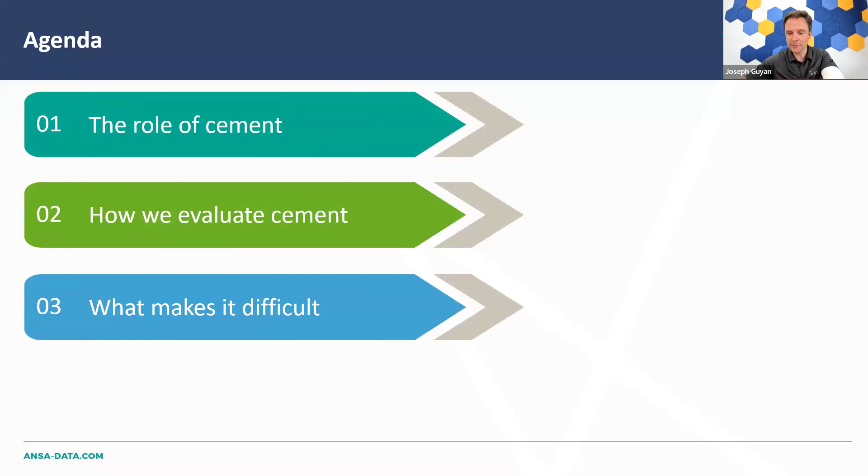So I'll spend just 5 minutes setting the scene for everybody. Let's see what we got first of all. So very simply, we'll just talk about what is cement doing in your well? Why is it there? It's all the well integrity and zonal isolation, and some examples of why it could fail and their consequences. We'll talk a little bit about how to evaluate cement, concentrating on sonic logging methods and what they show. We'll ask ourselves what makes it difficult, what are the limitations of logging tools and any real-world obstacles that we might have. What do ultrasonic tools add to this?

This leads us nicely into the example that Faris is going to show us, which will be concentrating on the logging tool that we've seen quite a lot of lately, the NuSonix from Cereus Ultrasonics. We'll talk a little bit about that and what it's bringing to the show.

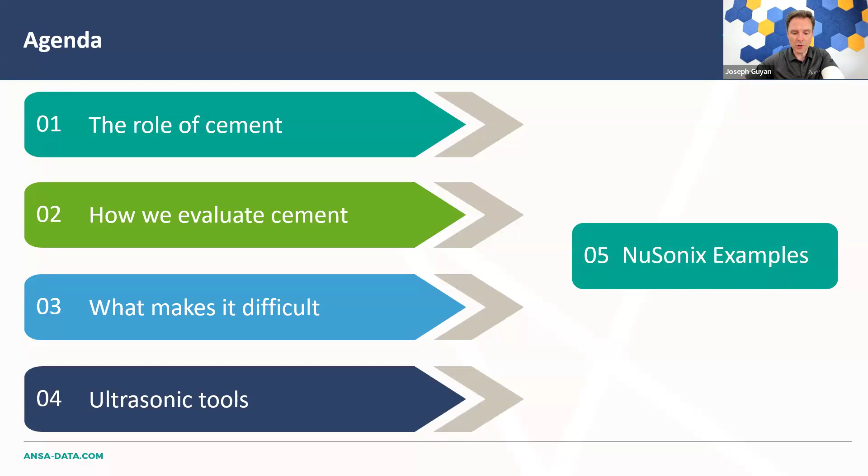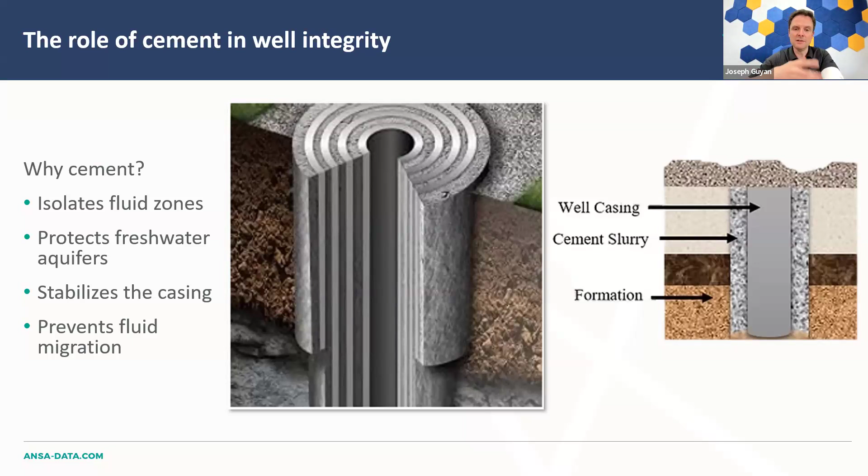So the role of cement, very simply, again, this is going to be a very quick version of it, but in oil and gas wells and geothermal and various other wells, where does the cement go and what role does it play in well integrity? It's a broad topic. Very quickly, the cement is placed in those spaces between the well casing and the borehole wall, and sometimes between other concentric strings. Its purpose is to seal and support the well. It stabilizes the well, ensuring several critical aspects of isolation, and ideally it continues to function in that way for decades after completing the well.

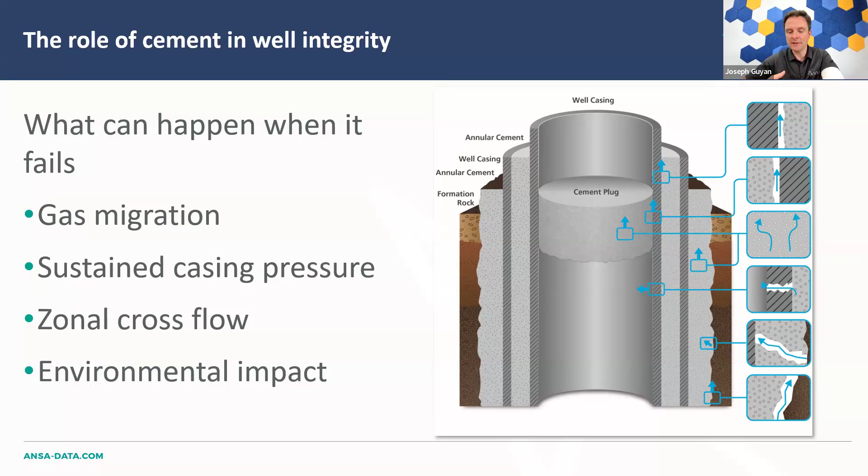So what can happen if it doesn't go all to plan? Perhaps the cement itself doesn't bond properly to the casing or to the formation wall. Perhaps it degrades over time for various reasons, and the consequences of that can be severe. For example, the produced fluids could migrate between zones downhole, or perhaps migrate to surface or into freshwater aquifers. Cement failure itself can manifest in several ways, which affects production, safe operation, and preservation of the environment. So evaluating cement bond integrity really isn't optional. Managing your well integrity can be seen as a license to operate, and that's what leads us to the technologies that we're discussing today.

So why is it so hard to look at? It's kind of obvious, but once it's in the well, you can't look at it. We can't inspect it directly. So we generally rely on acoustic logging methods to evaluate how well it's bonded to the metal of the casing and to the formation wall. And the most widely used method is the cement bond log, or CBL.

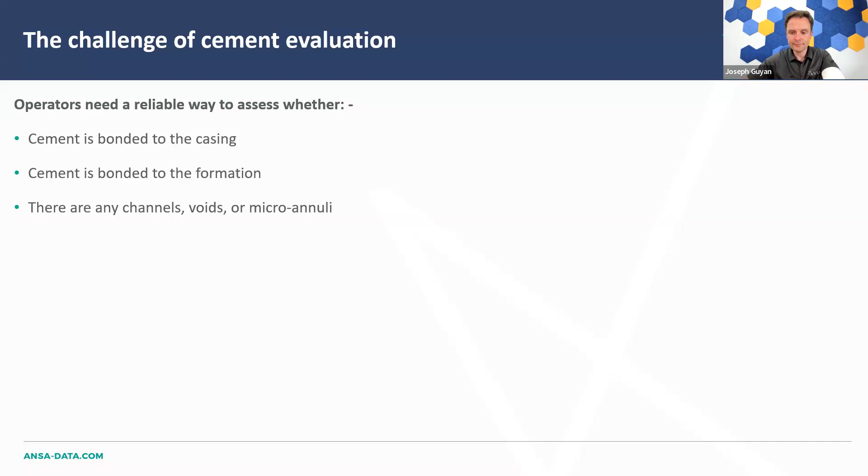Again, another big topic on its own. You can run a week's training course on this. We're going to brush over it very quickly, but I'll just say that for the moment, these tools measure how acoustic waves travel through the casing. Specifically, it measures the amplitude of the signal traveling down the casing, which gives quantitative information about the cement casing bond.

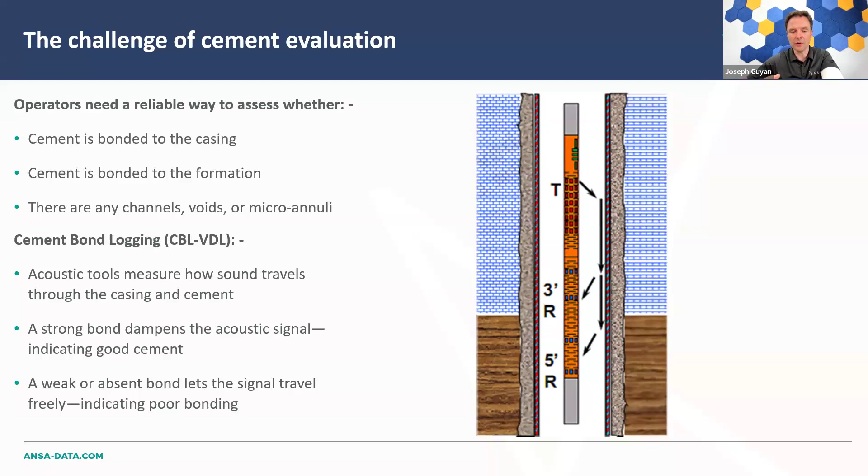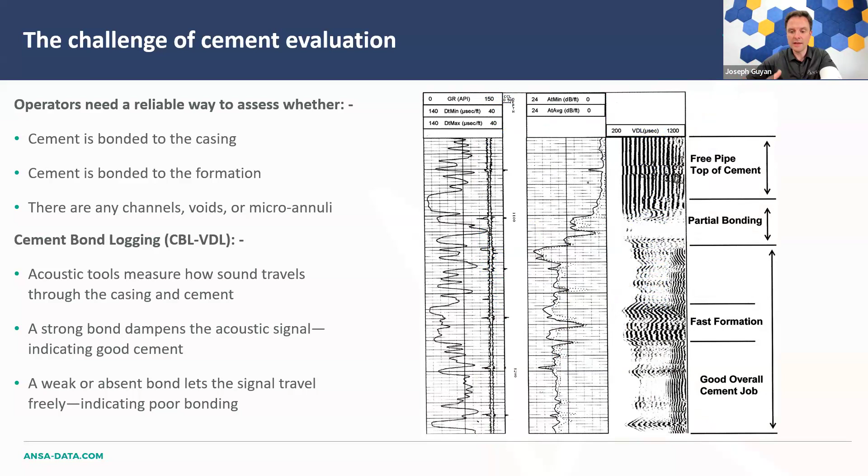And another aspect of that measure, the variable density log, seen there on the right of that image, provides information about the cement to formation bond. So using the VDL and the amplitude log together helps you evaluate the condition of the cement in your well.

Now, why is it difficult? There are various reasons again, but partly because the cement placement itself can be imperfect. The casing perhaps is off center, so you've got different spaces on either side of it, meaning perhaps that the cement can take the path of least resistance as it's placed. Over time, you might develop very small gaps, so micro-annuli, you'll hear that phrase. These tiny gaps can allow fluid migration.

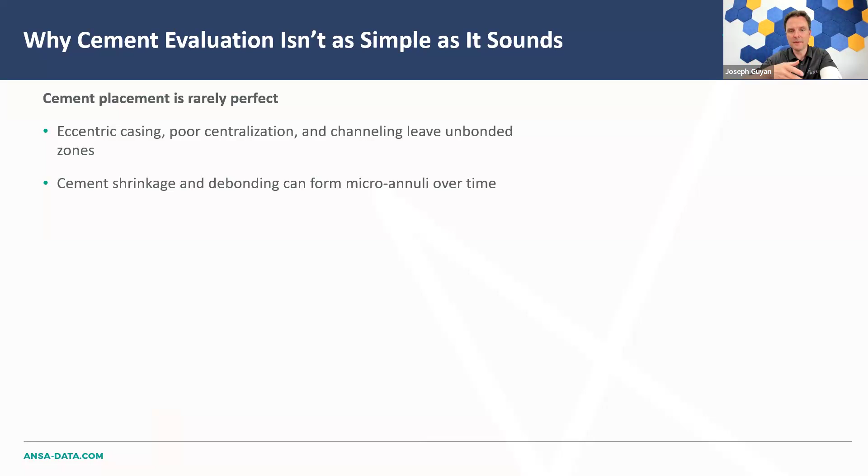The conventional CBL and VDL tools only measure acoustic signals averaged around the casing. So that means that if 80% of the casing is bonded, but 20% has a vertical channel, the average response might give you the picture of a good bond. There is some nuance there. That's a pretty simplified version of it, but you also have different sonic tools like segmented and radial tools, and they can give more details about the variations around the circumference.

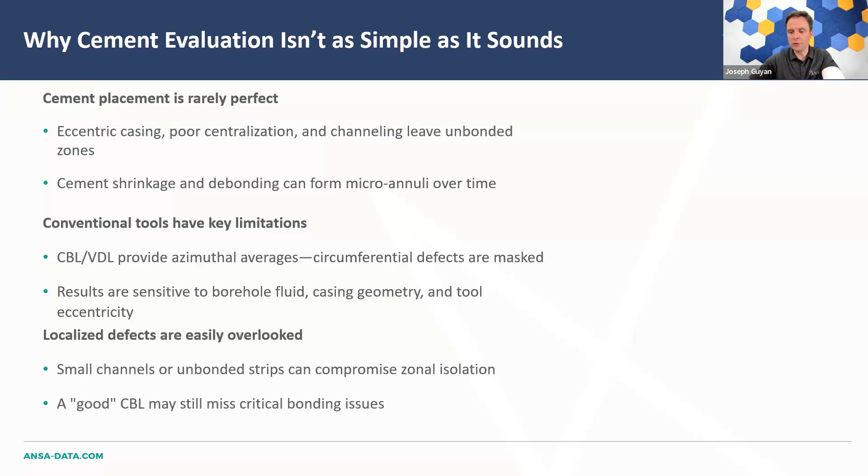In general, when using CBL and VDL alone, you don't get the full picture. So that's why you might want to consider adding something else to your toolbox. So that would be ultrasonic inspection. These tools emit high-frequency pulses and measure the reflected signal at the casing and cement interface.

Fundamentally different is the ability to scan the full circumference using some form of a rotating sensor. So part of your result is a radial map, which highlights in greater resolution where the contact is strong and where it may be poor. This is useful for identifying features like partial bonding or perhaps channels that might not strongly affect the average signal in a sonic log. It doesn't replace the CBL or VDL.

Sonic tools are still widely used, but when localized defects matter, for regulatory, environmental, or operational reasons, then ultrasonic methods can provide complementary detail. And the table on the screen there shows you why you might want to run them in combination. Choosing between them basically depends on the objective, your well conditions, and the required resolution of your result. In many cases, the best insight comes from integrating both approaches.

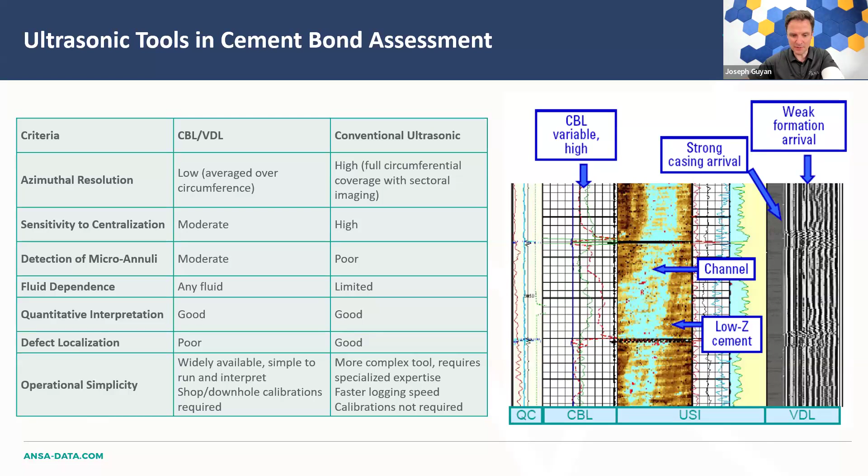Let's first start with a proper introduction of this technology, the Nusonix tool. It is an ultra-high bandwidth ultrasonic tool developed by the company named Cereus Ultrasonics Limited. The tool operates in virtually any liquid or pressured gas environment, and it's compatible with pipe sizes ranging from 2 7/8 to 13 3/8. Like other tools on the market, it delivers both pipe inspection and cement evaluation capabilities.

For the principle of measurement, it's straightforward here. You can see in the first part of the image on the left-hand side. We have an ultrasonic transducer that emits a high-frequency sound wave towards the inner wall of the pipe. A part of that wave is reflected back to the transducer while a smaller portion transmits into the pipe material, whether it's steel or another material.

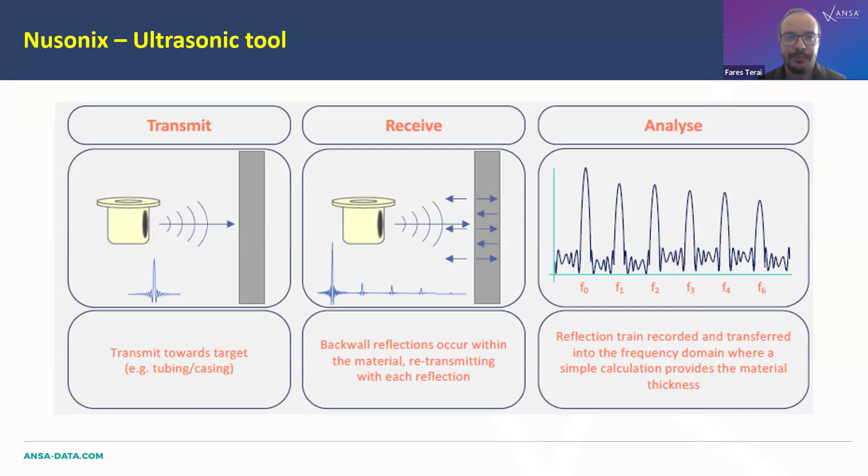The wave then continues to bounce between the inner and the outer wall of the pipe, gradually losing energy with each reflection. These multiple echoes we're seeing on the right-hand side part of the image. These echoes are captured and converted into the frequency domain, allowing us to accurately calculate the thickness. In the next slide, we can see in a bit more detail how the signal looks.

All right. So in the top section, number one here of this image, we can see the full ultrasonic waveform where individual reflections are clearly defined, thanks to the tool's very high bandwidth signal. And right below, number two, this is the envelope of the decay rate within the resonance window, highlighted in red in image number one. That envelope is the decay rate of the reflections occurring at the casing cement interface. This decay behavior is what really allows us to determine the bonding.

Finally, number three, in the bottom section, we see the signal transformed into the frequency domain. Notice the multiple harmonics captured by the Nusonix tool. And the spacing between these harmonics is what we use to accurately compute the pipe wall thickness, as explained in the previous slide.

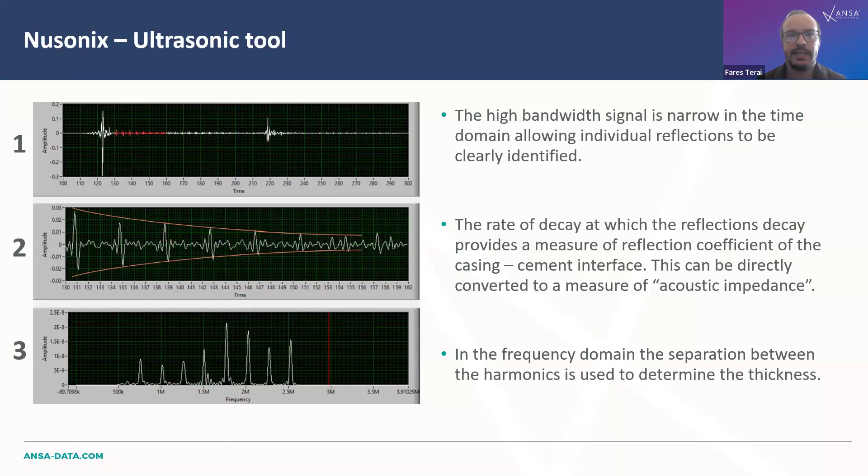For the next slide, there's a comparison between the Nusonix and what we call the conventional ultrasonic tools. On the left-hand side is the conventional tools, and on the right-hand side is the Nusonix. In the top half of the image, which represents the time domain signal, you'll notice that the first reflection in the Nusonix waveform has a narrower width. However, when we move to the frequency domain, we actually see a broader and richer frequency band available for analysis, which really gives us much more to work with in terms of resolution and accuracy.

The same observation applies to the echoes in the lower part of the time domain view. These are recorded right after the initial reflection, like I mentioned, the resonance window. Here you can see clearly how well defined and distinct the back reflections are in the Nusonix signal, especially when compared to the more blurred or merged echoes coming from the conventional tools.

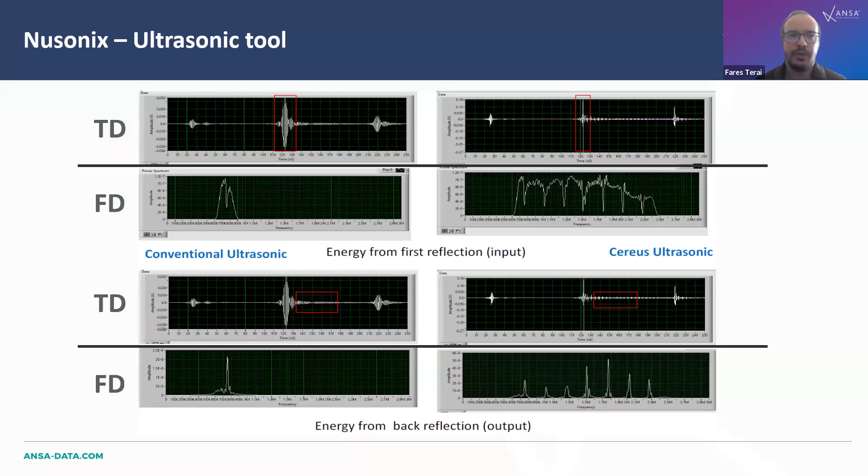If you can give me the next slide, Joe, I'll talk about the outputs, what the Nusonix gives us for the cement part. Concretely, the Nusonix tool offers two options for cement interpretation. On the right-hand side of the image, we have the bond log map, which follows the conventional method, widely used by most tools in the market.

In a nutshell, it's based on the normalized tail energy. It was called NT in the beginning of the tool development. So it's the normalized tail energy of the casing signal, which is influenced by the casing's rear interface. This energy is then normalized to the front face reflection, the sharp increase in the first amplitude, that peak amplitude, to provide an estimate of bonding quality.

On the other side, the left-hand side, is what really sets this tool apart from the competition. That's the micro debonding map. This output is based on the rate of attenuation observed in the casing's back wall reflections. By calculating the ratio of energy decay between each back reflection, the tool provides a sensitive indicator of the acoustic impedance at the boundary right behind the casing.

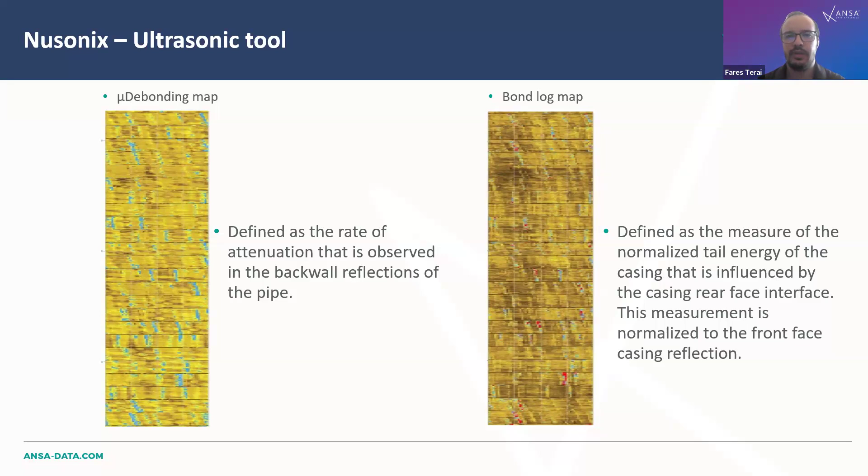Of course, these color maps, along with their recommended ranges and scales, are not set in stone and are subject to fluctuation and interpretation, depending on the conditions and the cement properties. As more data sets are acquired and analyzed, they are likely to evolve to better reflect the full range of field conditions. But that doesn't prevent us analysts from a bit of tweaking according to what we're seeing, well conditions, different cement properties, and so on.

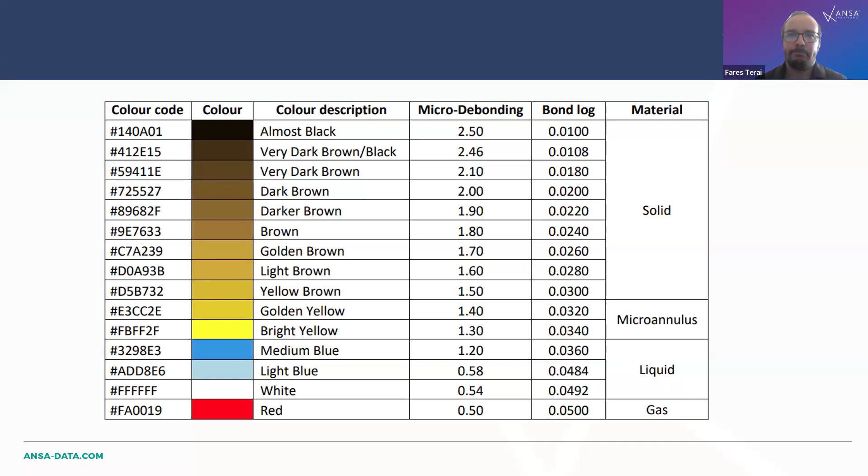I believe it's now time to step away from the theory. I do have a case for you today, so we can see together how this tool performs. Before looking at the actual data set, there's a bit of context I want to start with.

In this case, the customer wanted to run the Nusonix in an injector well completed with a 5.5-inch liner. And behind it, there's a 7-inch casing towards the upper section. So we have a dual string configuration over a pretty short interval towards the top. 100 meters of perforations between 2,415 and 2,315 meters, perforated there to allow for a cement squeeze.

They aim to isolate a specific formation. I'll talk about the formation in a bit. So according to the perf wash cement standards, we do need at least 50% of isolation within the target formation for the operation to be considered successful.

And it's also worth mentioning that we do have an RBT logged alongside the Nusonix, which is cool. This allows us to directly compare the performance of the Nusonix against the conventional sonic radial bond logs. By the way, the formation is called the Z1 formation here, and it's mainly composed of anhydrite. So yeah, keep that in mind.

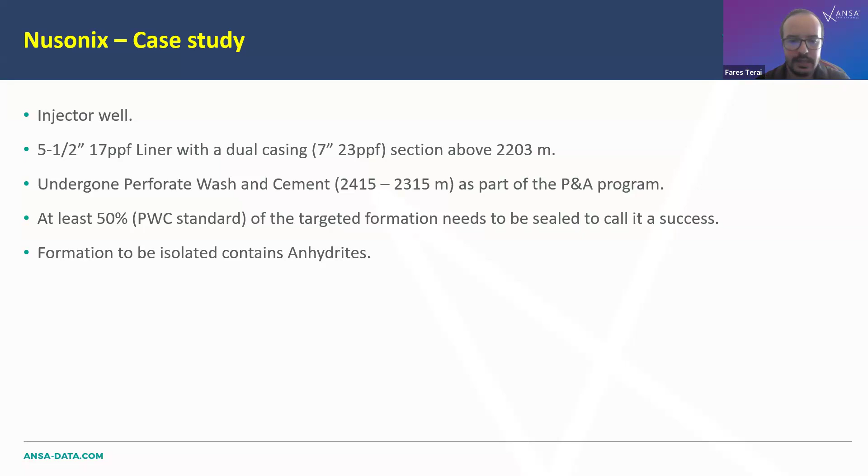And yep, let me now take the screen sharing. Yep, should be. Is it working? Nearly there. I think it takes a second to come up. Yeah, let's just wait for it. Let me stop and try again. Share. Yeah, I think it's good now. Yep, thumbs up. Right, nice.

So yeah, as you can see here, this data set includes a lot of tracks and a lot of information, I know. But don't worry, we're going to break it down step by step. I'm gonna focus only on the features of interest. I'll walk you through each of the relevant tracks, and some of them will probably be familiar to you, others maybe new, but we'll sort it out all together. I'd like to start with two key points.

First, as I mentioned, we have 100 meters of perforations, and that is clearly visible in two maps here. If I zoom in a little bit to that interval, we do have ECO map and radius map. In the radius map, we have those red dots, which represent the channels or the perforations themselves. And next to it, the ECO map shows as well slots or perforations here in lighter color. So both maps are a very good indication of the perforation operation.

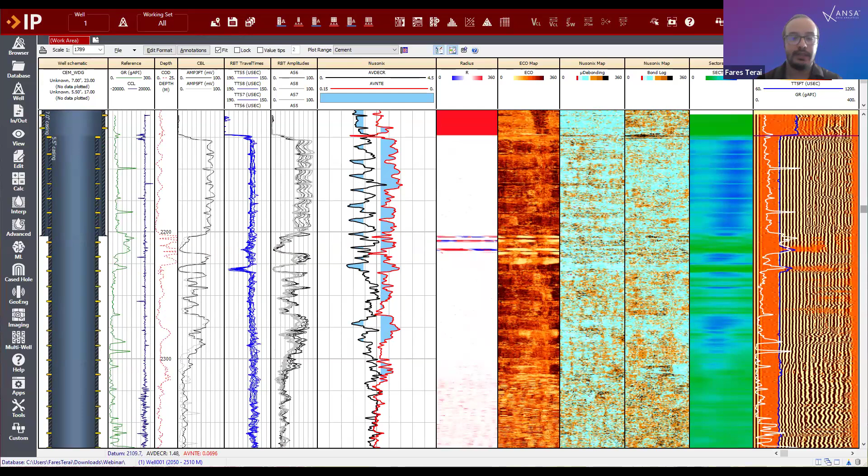And both are below the solid cutoff, highlighted here in blue, meaning that the annulus is liquid filled, not micro debonded. Towards the middle, our well bonded zone. The curves overlap, which is a strong indication of good bonding, and that matches our observation of clear formation arrivals. And this is a typical sign of a well-executed cement job when you see strong formation arrivals or fast formation arrivals.

This overlap continues down to around 2,430, about 2,437 meters, below which we re-enter the liquid zone. So significant separation, blue shading. So we're back into fluid again. Interestingly, within the middle part, the sector map here in RBT shows a slightly shallower, what we call it, bottom of cement. So it ends pretty much here.

So within this section, from about 2,423 meters to 2,437, we do have 13 meters of liquid, which is not the case in Nusonix. The Nusonix indicates that we still have cement here. This discrepancy between the two is probably because of the thinner cement sheath near the bottom of the perforated interval. It does impact the sonic tools because the attenuation of the signal will be decreased. So that's why we'll have higher amplitudes in the sector map.

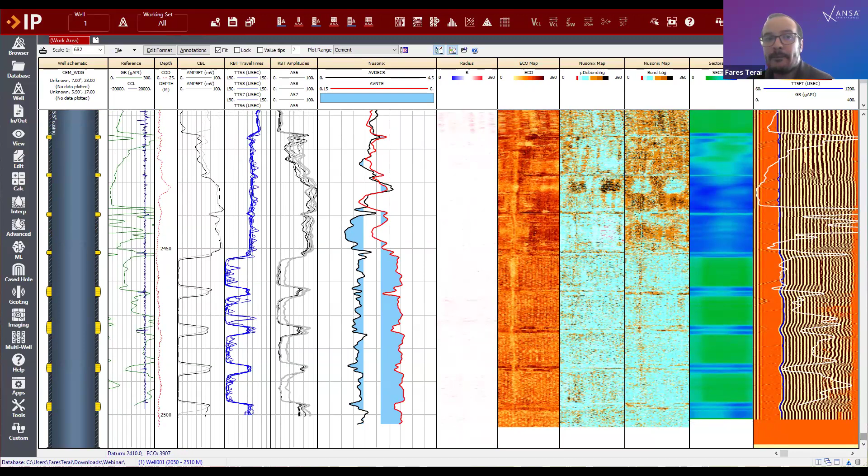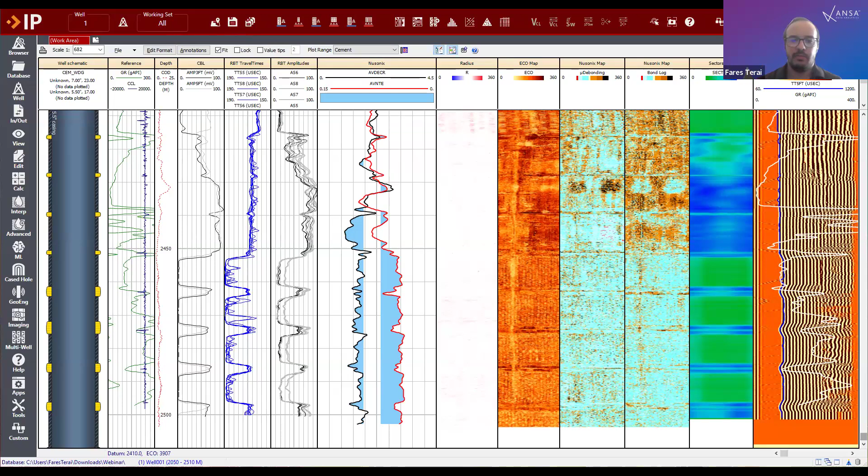So the key message here is leverage everything the tool gives you. Every curve, every measurement, every insight can be the missing puzzle piece in your interpretation. And with a tool like Nusonix, it gives you multiple perspectives. Your analysis becomes not only more complete, but also more robust. So like I said, it's a shame not to use whatever piece of information is available to you.

Also, a curve that has to be checked in all ultrasonic tools is the eccentricity of the tool. It should be kept within a reasonable range. What I want to look at is any change in the eccentricity trend. So there is a sharp increase, and it happened here. If you look at this track, I'm going to extend it a little bit for you, there is a significant increase in the tool eccentricity, and that's because of this buckling.

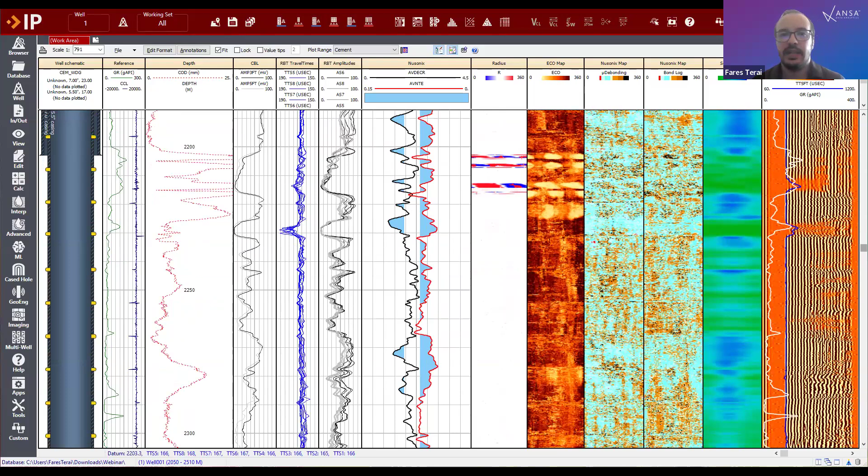It happens. That's normal. When the tool goes through deformations, it will shake a little bit and get off center, and that's another indication of features that could be falsely interpreted as something else. And I think that's a wrap for today's walkthrough.